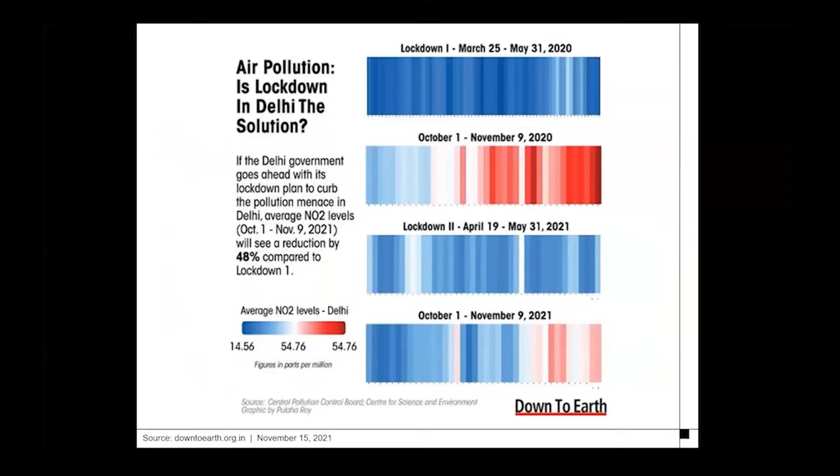Bill Gates, all of you know Bill Gates, but have you read this book called How to Avoid a Climate Disaster? This is a year-old book by Bill Gates. And in that, he also comes out with this.

Having said that, when we talk about cities, we use all kinds of words: rethinking cities, sustainable cities, resilient cities, livable cities, and the latest buzzword is smart cities. To be very honest, I don't really want to decode all of them.

I would like you to also respond, unmute if you can, quickly. Can you tell me what you see in this slide? Can somebody unmute quickly and respond? What do you see in this slide? What is your reading of this slide?

Rapid urbanization, yeah, fair enough. Anybody else? Fast speed of life, okay. What else? Anybody else?

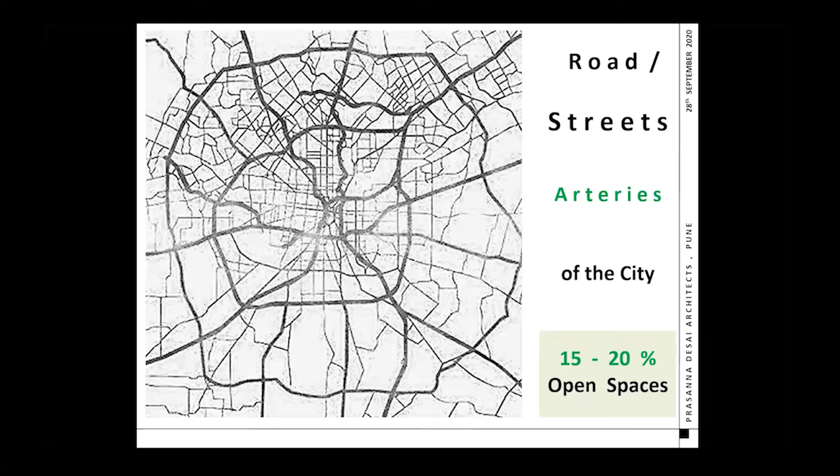Now I come to a situation where we say streets and roads are arteries of the city, and this is actually 15 to 20% of the open space. In any city for that matter, minimum 15 to 20%. And we compare it with a human body. So the human arteries actually carry the blood, and similarly, the city's streets carry the movement.

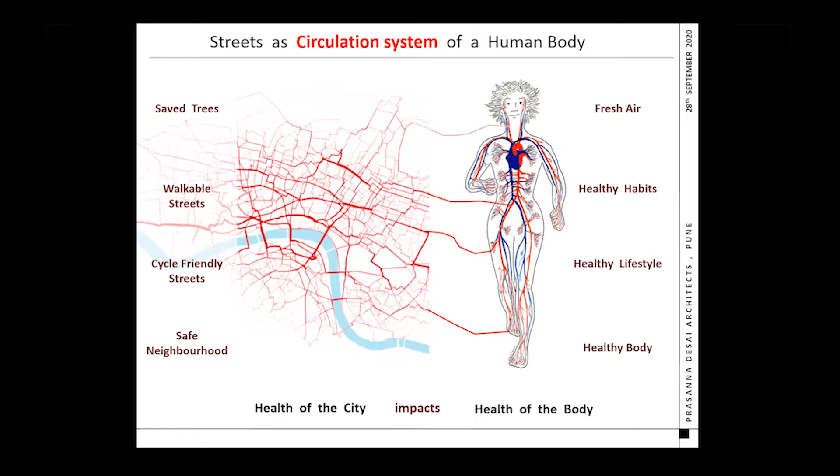So in a city, if you have saved trees, you get fresh air. You have walkable streets, you get healthy habits. You get cycle-friendly streets, you have a healthy lifestyle. And you have a safe neighborhood, you have a healthy body. That is what we are looking at.

But is it really fine? Is it safe at times for you or us? How many of you have heard this name called Enrique Peñalosa, where he says, point to ponder, a developed country is not a place where the poor have cars. It is where the rich use public transport. That is a developed country.

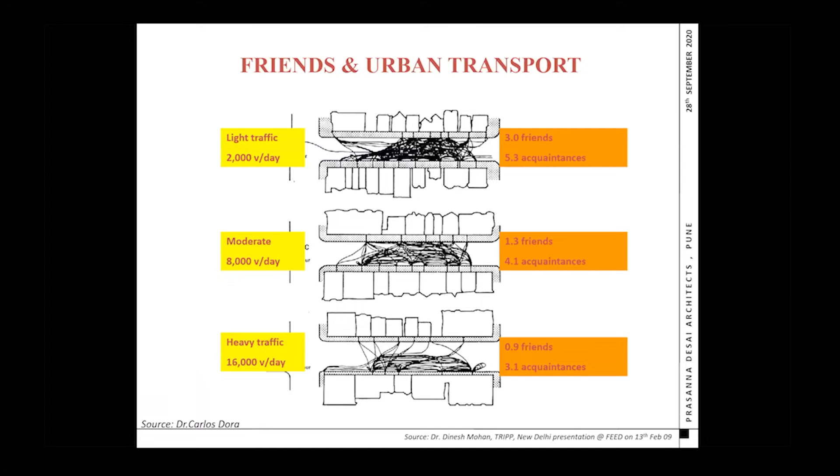So I can very well, very categorically say through this research that because of this kind of development being shown on the left-hand side, we are dividing the society. The society is getting divided. And we as a society will have to pay a price for it unless we reverse the process.

It doesn't matter, you keep on widening the street, more lanes, more lanes. Mumbai very proudly added flyovers all over the city 15 years ago. What has happened? Your streets are also full, your flyovers are also full. You added an Eastern Express highway, slowly that will also be full. Now you want to add a sea link or something on the other side, that will also be full. It will not solve any problem.

It is like this. How many of you have heard of Lewis Mumford? Building more roads is like loosening your belt when you are getting fat.

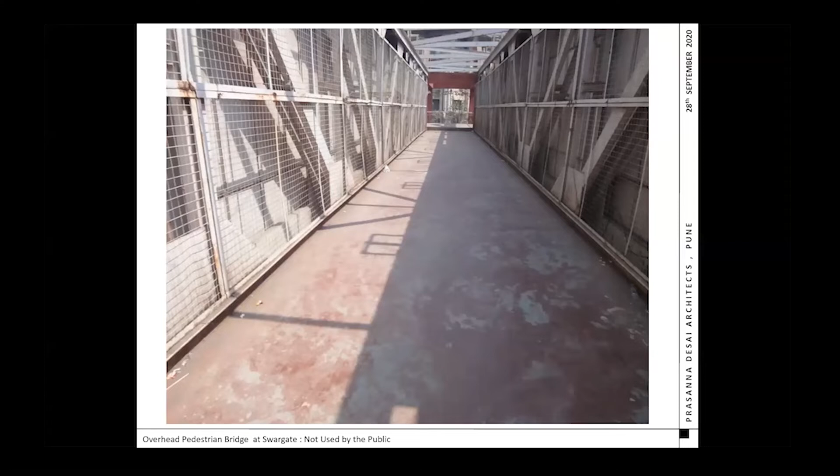Now, to make it safe, next thing you can do is this: you make it transparent. This foot-over bridge is constructed in Pune, at Swargate, at a cost of 5 crores or whatever it is, and in a day, not more than 10 people use it.

So foot-over bridges, people will not walk unless they are connected with a railway track, the way it is in Mumbai. You have from platform number 1, climb up and then come out straight to JJ college on the opposite side, crossing the road. That is fine. I'm saying this specifically because most of you are from Mumbai and stay right there at JJ college. But these kind of foot-over bridges are absolutely of no value.

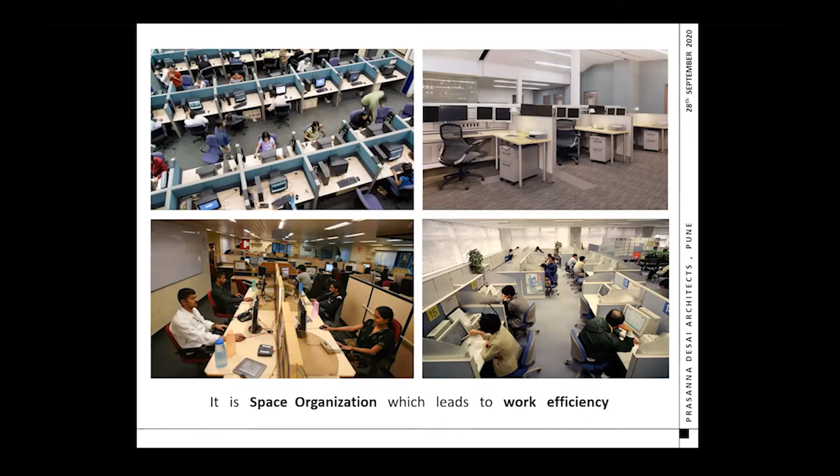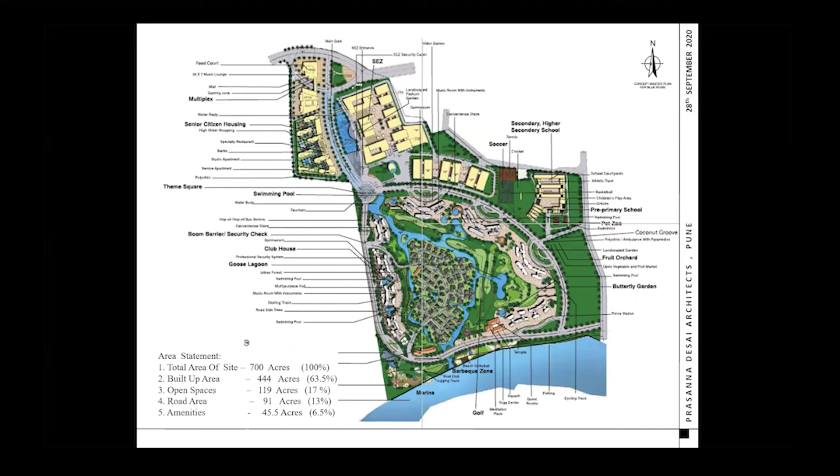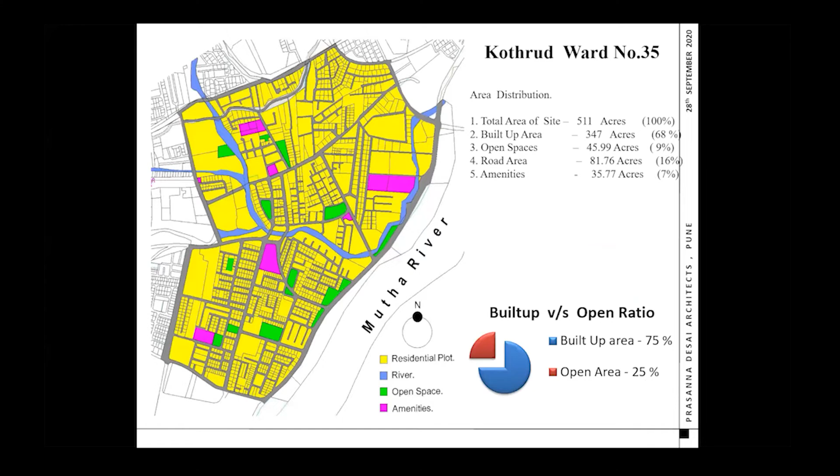And if that is so, we took these master plans from these brochures. Our whole argument is, if the builders' township needs to have this kind of fabric, then why can't one ward—a ward being a municipal limit of a corporator—why can't we have a ward which has all this walkability, cycle paths, museum, garden, everything, but we reorganize the ward? And this is the kind of analysis that we did.

And there are some more slides. Look at the importance of trees in certain brochures: Take your mind to wonderful new highs. See beauty, live beauty, think beauty. I'm just picking up some random things—this is the way we look at greenery. But do we really care for this green? A fresh viewpoint for a thinking mind.

So with this kind of background research, we say this is the dasha—you understand dasha?—and we keep on criticizing. So we have a project evolved over two decades of research, called Project Disha. What is Project Disha? It is a demonstration of integrated, safe, habitable, affordable solutions for a neighborhood. Very simple, that is Project Disha—give a direction.

You need to come out with solutions, you can't only be criticizing. So how to change the dasha to disha? Data collection, design, discuss—you collect the data, design something, discuss with people, and then demonstrate. That is Project Disha, and it incorporates very simple things: street lighting, garbage disposal, trees, walking, cycling, public transport.

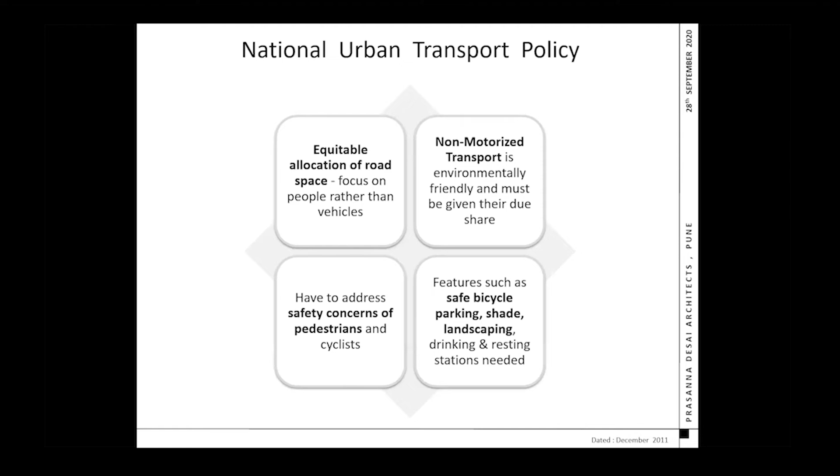Now let me come to this interesting slide. What will you do with 1,000 crores if you have it in a municipal corporation—whether Mumbai, Satara, Jalna, Kolhapur, Nagar, or Aurangabad? With 1,000 crores you get an underground metro of just 2.5 kilometers, and this is very old data—now you won't even get 2.5 kilometers. An elevated metro gives you 5 kilometers, meaning 200 crores per kilometer.

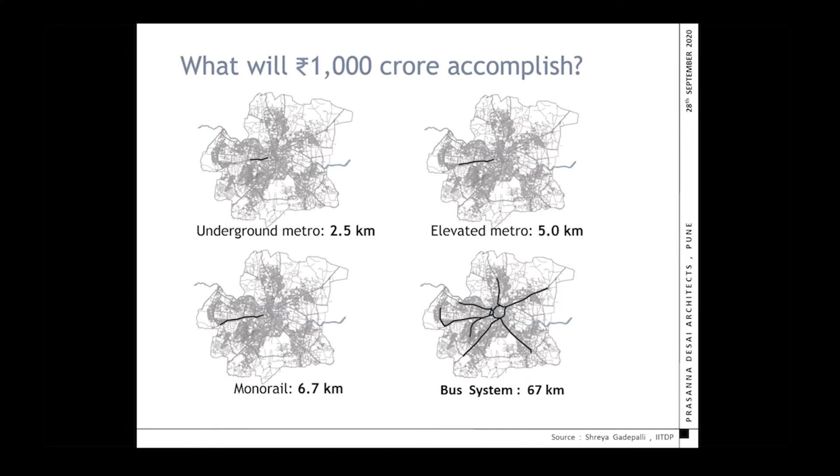A monorail gives 6.7 kilometers, whereas 1,000 crores gives you a bus system of 67 kilometers. Smaller cities like Jalna, Kolhapur, and Nasik should have a bus system—a nice bus system is good enough. Maybe larger cities need a metro. Having said that, it's the cycle, pedestrian, and public transport—bus in particular—which will hold the city or the neighborhood together.

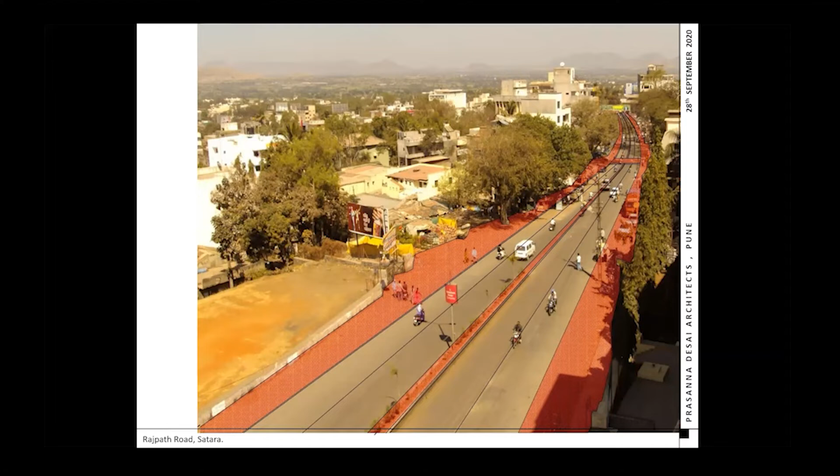So fair enough. Then we have this another medium that we use now. Can you see this video? This is the way we take a video of a street. And we demonstrate to people that this is the only space on a street being used for vehicles. The rest is parking and pedestrians. And that is how we build up our theory.

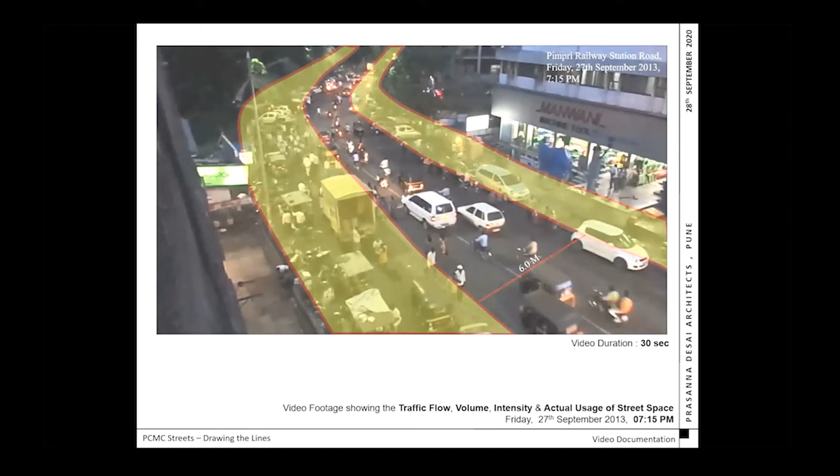This is in PCMC. The time is there—evening, 7 p.m., peak hour traffic. And then there's another video of the same street, this was way back in 2013, almost 9 years ago. And then we make views like this. Now comes architectural composition, our area of expertise. And then we build this up—rickshaw at a particular spot, two-wheelers at a particular spot, more parking provided. I will show you how we build this up.

Now, guiding principles in the public realm are six. Number one is universal accessibility. This is the main act that we use. Universal accessibility gives us the advantage of making a footpath at one level. And once you put in universal accessibility, this is all the benefit that you get: your wheelchair can move, your blind can move, your trolleys can move, your pram can move, and also your shopping cart.

The second one is walkability at continuous surface that we discussed—continuous surface, footpath at one level, uninterrupted movement, safe and segregated walkway, which will get us health, comfort, social interaction, and connect between people, and reduce vehicle trips on the right-hand side that I've written, pollution, chaos, and conflict.

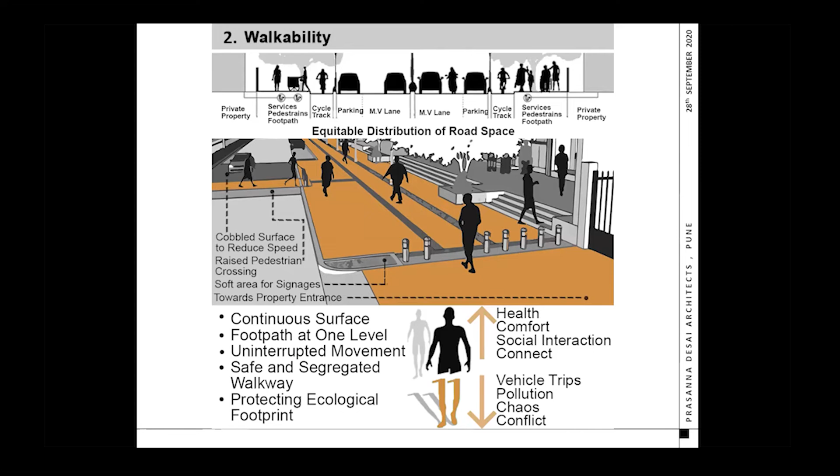This is point number 2. Point number 3 is parking. This is very critical. We must provide for parking, but it cannot be inclined parking.

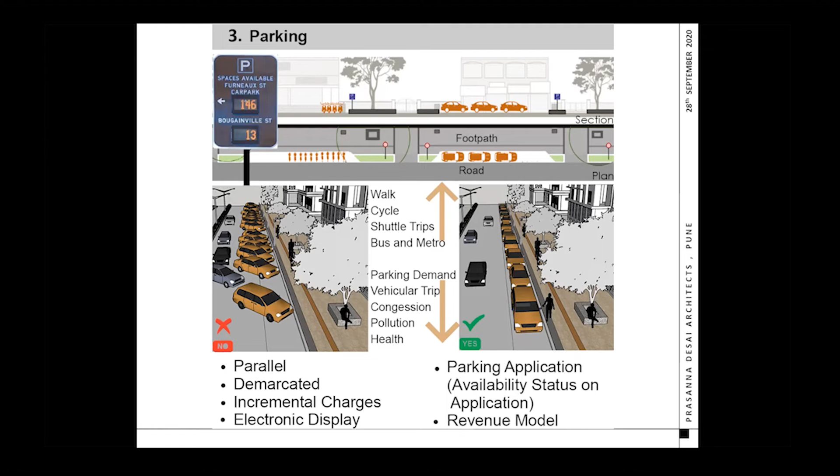And parking needs to be charged. It has to become a revenue model. You have to pay for every 1 hour of parking. Parking cannot come free. Hawkers and vendors policy.

I showed you some slides of the mall and everything. Why can't our street have this kind of painted tiles where a hawker is given a space, and that is his space, and there is a movement space? So this is the way the hawkers have to be organized.

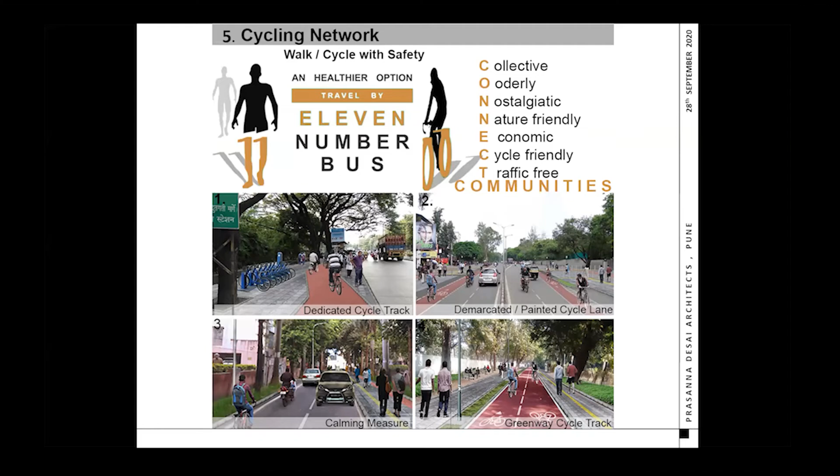The fifth one is cycle network. Can we provide a cycle network? I will not go deeper into it. There are 4 kinds of cycle networks that can be done: dedicated cycle track, demarcated painted cycle lanes, calming measures, and greenway cycle tracks. Maybe we can take this up in the question answers.

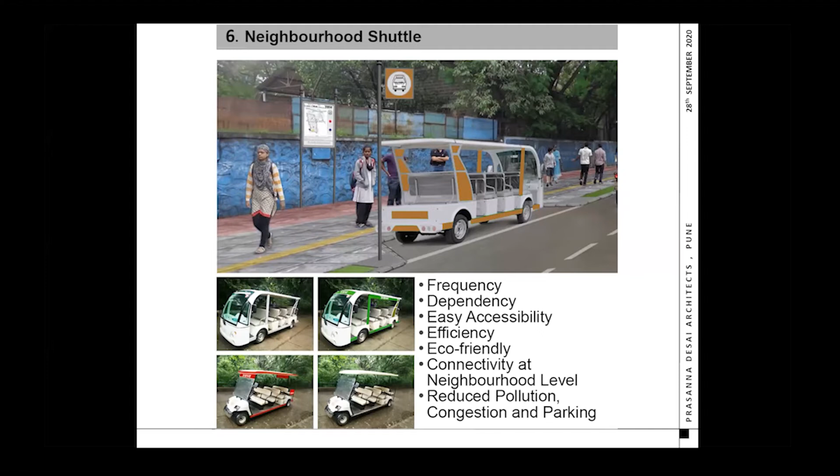And the sixth one is neighborhood shuttle. Now this is very common in Mumbai. You have a railway station and you have rickshaws which work like shuttles to bring people 1 to 2 kilometers up to the station. So in a neighborhood you can have shuttles which share and which also reduce the need for taking out private vehicles. So these are the 6 principles on which we started the design.

And we told the local corporator, dear sir, why don't you do it the way we are explaining? Do it like us, people will be happy and it will give benefit to the neighborhood.

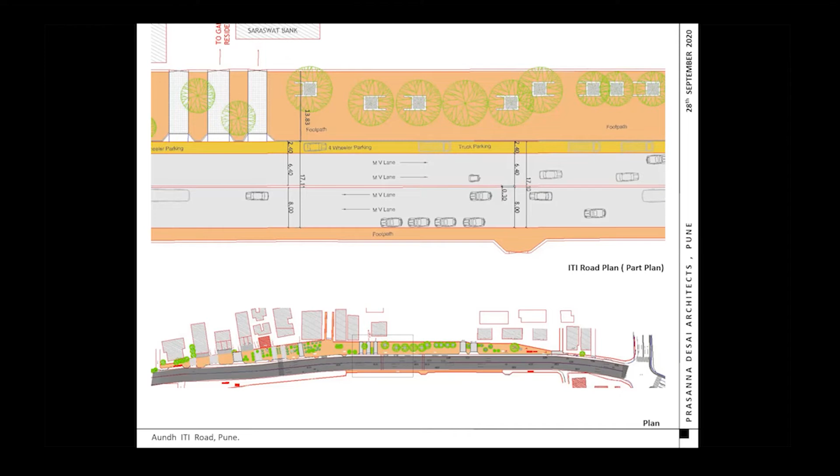Now, when we did this street, there were many questions raised. In my own society where I stay, they said, oh, you have seen how big a footpath they are building, the corporation people's minds have gone bad. This was the discussion going on in my society. So we didn't bother much. We continued, we made this, and then it became a hit for the people.

So this is safety, this is shade, and this is society. All three incorporated. And all that I discussed in the beginning with you, one by one, point by point, we are trying to incorporate in design.

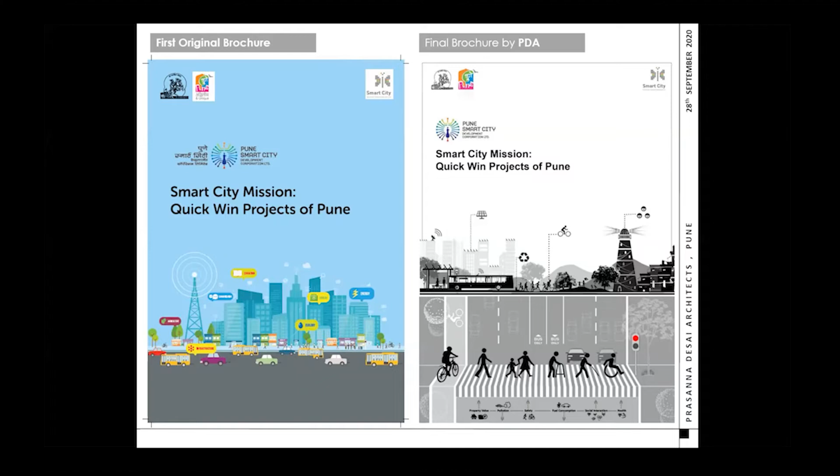Smart city has two components: PAN city and area-based development. We worked in area-based development with these policies: people, policy, participation, platform, and patience. In these kinds of projects you require tremendous patience, friends. You have to be very patient. You have seen our journey over 20 years.

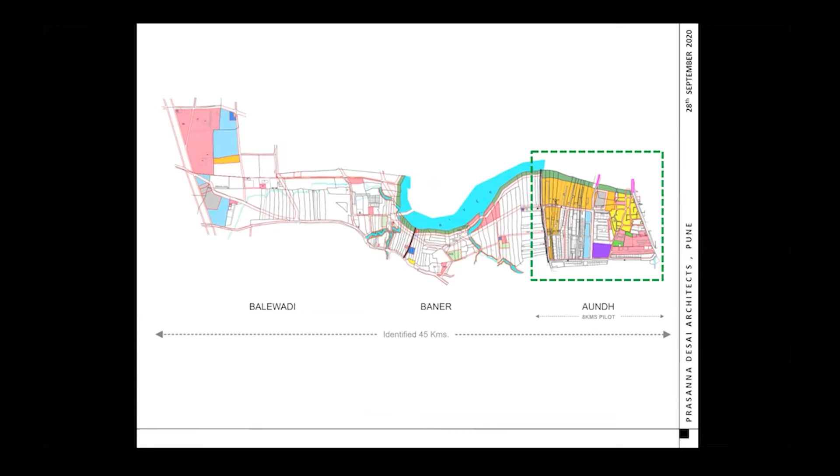We had a key plan and concentrated on Aundh, which was the area-based development. We told the Honorable Commissioner that rather than doing one street, which is a quick win project, we will take up these 9 streets. You can see the streets marked red, blue, orange, yellow, etc. You can say S1 to S9 is the naming. We are developing these streets one by one.

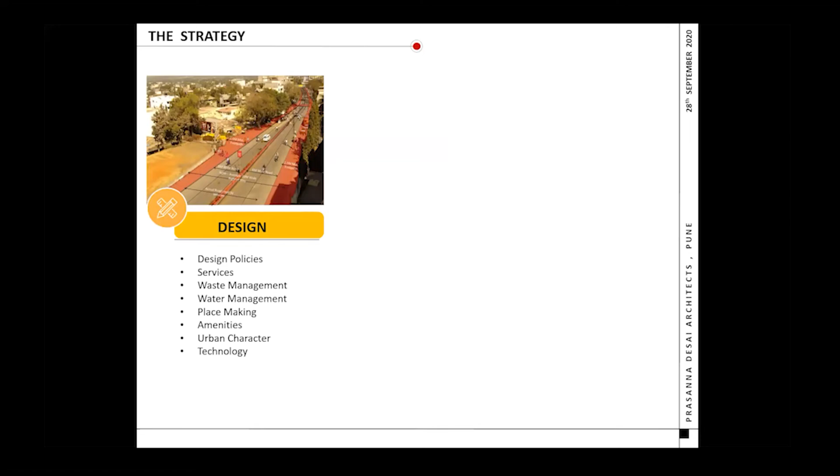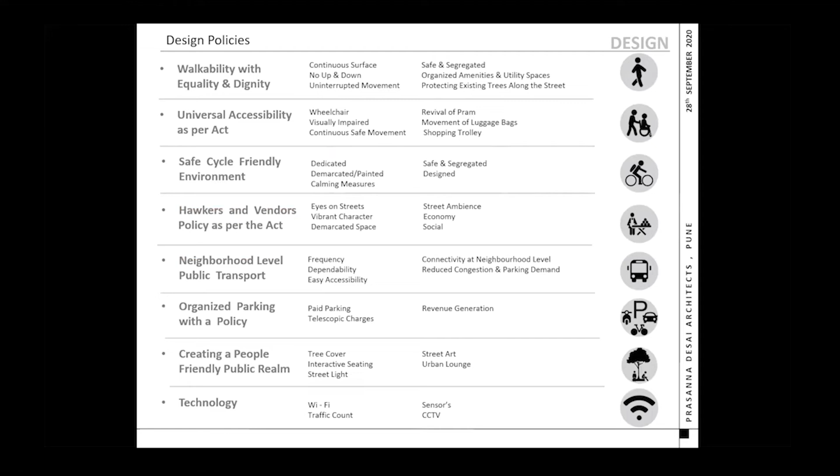The strategy is design, discuss, and demonstrate. These were all the elements I discussed. Our policies included walkability and universal accessibility, cycle friendly design, hawkers, and all that I mentioned. Then services like water supply, MSEB, drainage and all. Then street furniture, signage, public art — I will show you what we did. Then character, facade, material, texture. And then the design proposals were done.

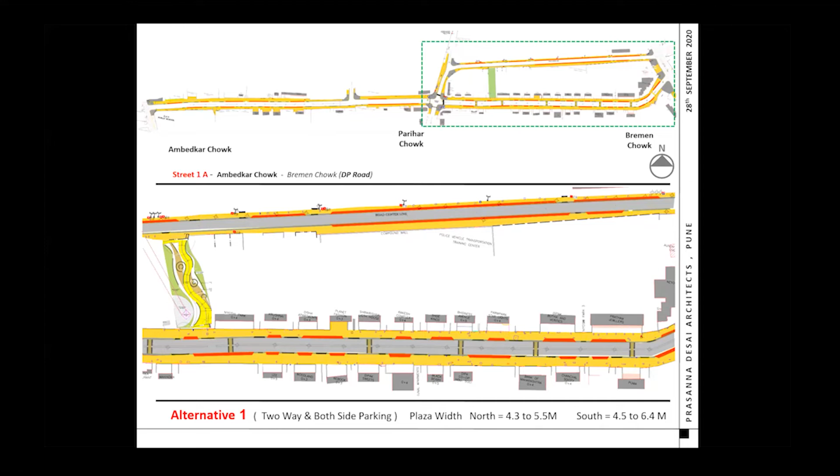These are the plans we made with options and alternatives. The bottom shows parking on both sides. The red marked is parking. Yellow is footpath, and the gray is the road, that is the street. There was a parallel street on top. So we had a proposal with parking on both sides. This was the street as it was, and we proposed how it could be.

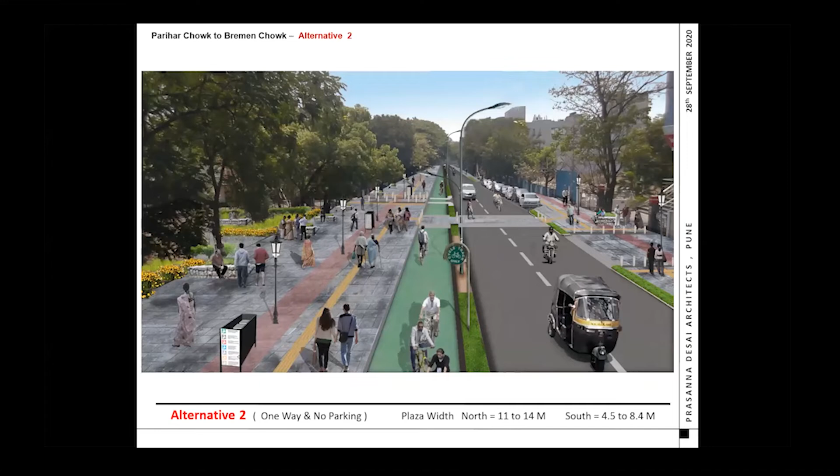We had another proposal where on the left-hand side we'd make a complete plaza, and on the right-hand side there would be a one-way street. We did this, and then we went into public discussions.

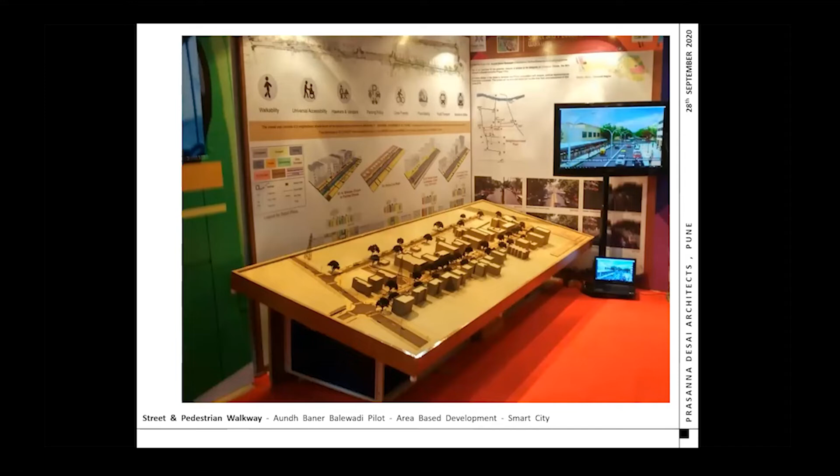We said we will close the street on the left-hand side and do a trial run. Then we again had public discussions with shopkeepers, citizens, and the Honorable Deputy Commissioner, and we named this whole project Healthy Aundh Ata Aple Angan. All of you understand Marathi — if you don't, it's not very complicated, it's Hindi: Healthy Aundh Ab Apna Angan.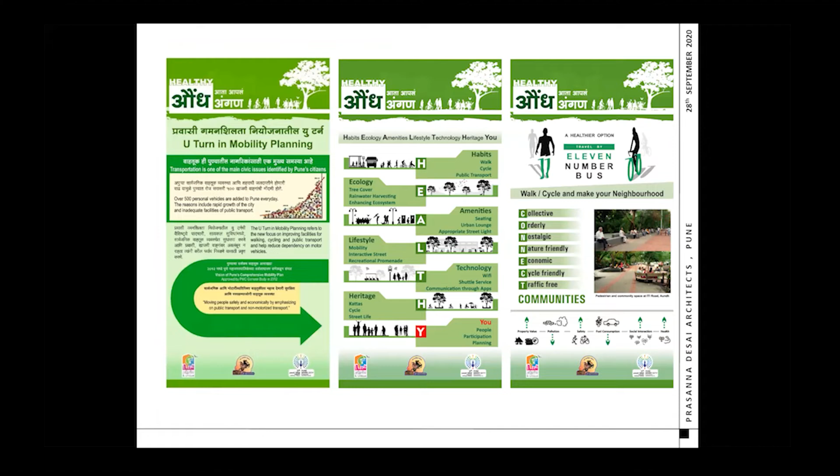Then we had these kinds of invitations, all made in our office. CEE, Centre for Environment Education, helped us, and many NGOs helped us too. These are all the posters: U-turn in mobility, the 11 number bus that I explained, DB Road Walking Plaza, and improvements in Aundh.

Then we introduced a shuttle service called Udan — green, orange, red, purple and yellow shuttles moving clockwise and anti-clockwise. It looked something like this, with a signboard like this, all designed at our office. We put up these signboards and tried to introduce this service.

There was a one-week trial run, Saturday to Saturday. During the trial, we closed this street entirely. This is the way people used the street — I don't have to explain, you can just have a look at the street and the way people use it.

So Stapu there, children with tricycles, small children skating, wheelchairs were back, handicapped people were back, senior citizens, cycles, and Udan - this was our Udan. We could manage this as a Udan, and this was the most successful thing. We made those stickers - can you see the stickers? The red sticker there, that is the red Udan. The left one is the yellow Udan. And these are the happy faces.

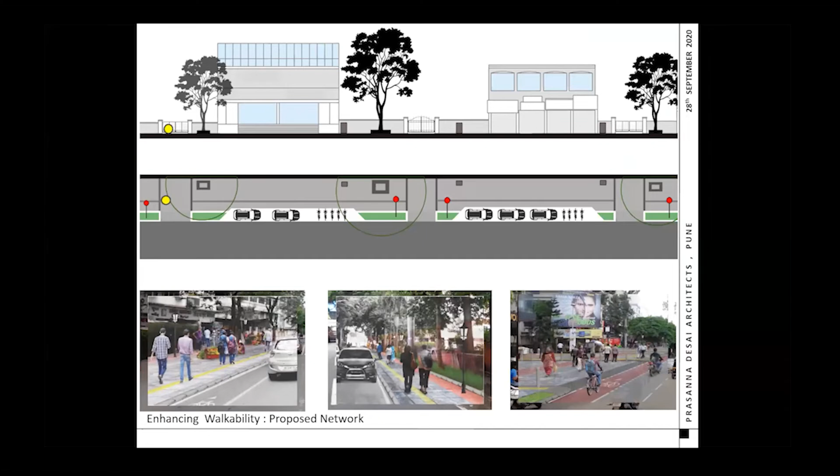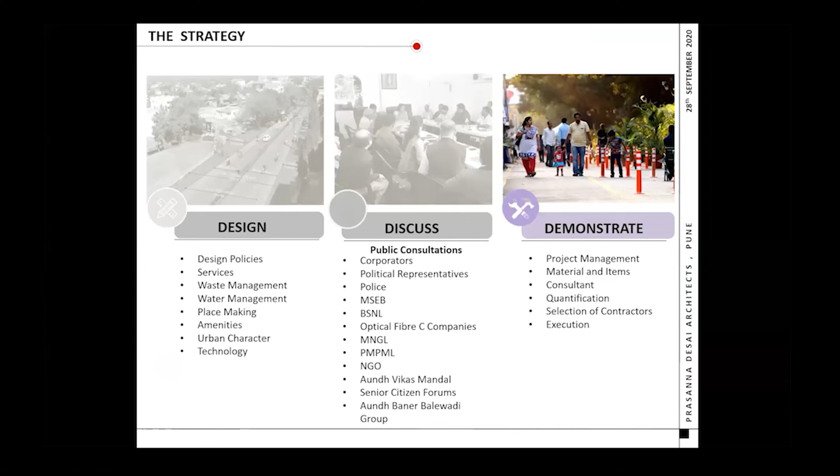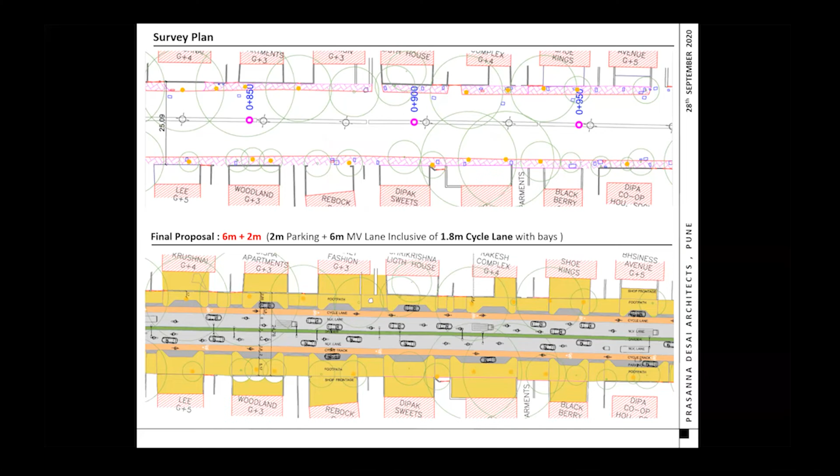We came to this design. Now comes pure architecture and urban design. You can see this yellow at the bottom, the top is the plan. The yellow is the footpath which was there, and people were going up to the shop there. So we said we will not close the whole street - we will have vehicles both sides, we will have parking on both sides, and we will have the yellow. But what we'll do is widen the yellow, and take the yellow right till the doorstep - widen the street. That means take out the boundary walls which are there in front, because this was all a commercial street. I will show you the images later on.

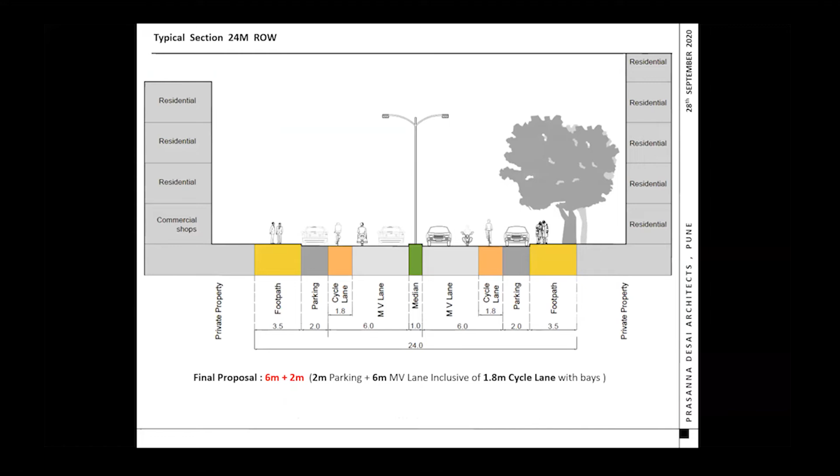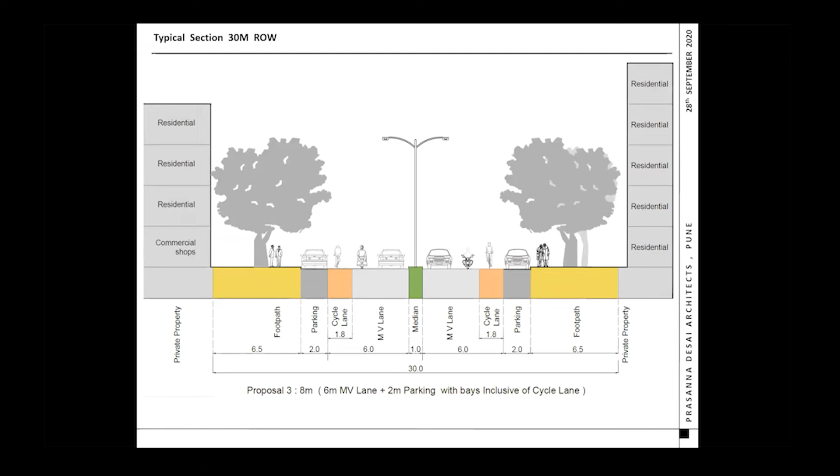So what you see in this street: the MV lane is 6 meters, then there is parking of 2 meters, then you have the footpath, and we took the footpath right till the property line. The yellow was extended right till the shop. So we had a wide footpath on both sides, 6 meters wide. We put in the services below, and then we got this whole thing signed from the commissioner and the engineer and all, to authenticate that this is what we are going to implement. And this is what was agreed, and these were the elements that we put in.

Hi, Ananya, do we have time? Can I go slow or fast or close? So you can go the way it is going. It's all right, is it okay? Yes, Saturday evening is not getting hampered, no?

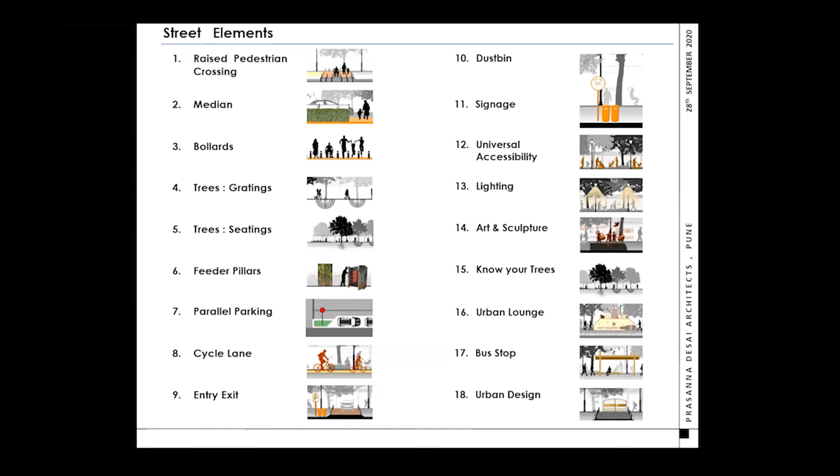No, definitely not, sir. So, raised pedestrian crossing - first element of our design. This is the way our speed breakers are in all the streets, so where you jump, at times you skid. Speed breaker causes 30 crashes and 9 deaths a day. So we said we must redesign this. How do we redesign this?

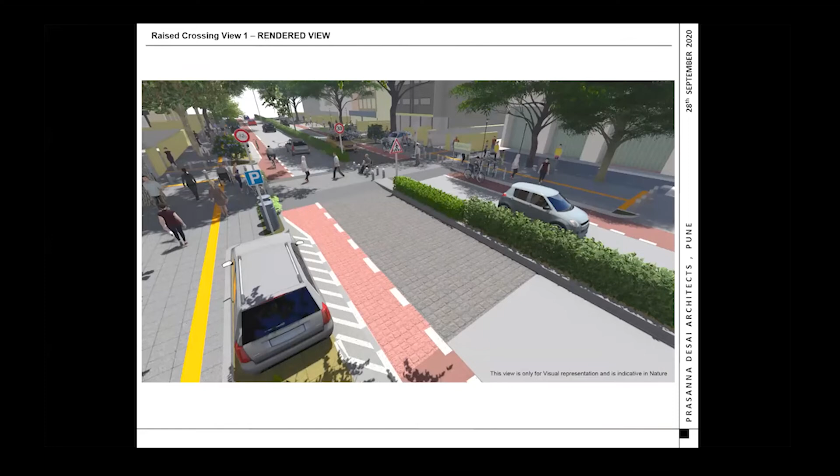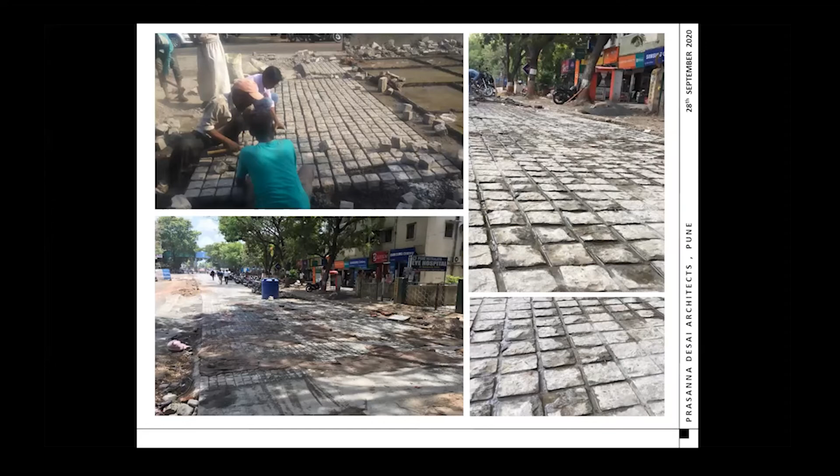We had this whole idea of putting cobble. You can see this diagram - there is a cobble there, and then the raised pedestrian crossing. What is it? It is a stone like this. So this stone will bring down the speed, and we put the stone on through the street like this before the raised crossing. This automatically reduces the speed of the vehicle - you slow down because my own father or my own son is crossing. So instead of this normal speed breaker, this became like a speed breaker, and this is the way we implemented it. Now it has become common in the city of Pune to use this kind of speed breaker, which is called cobbled speed breaker.

So you raise the pedestrian walk at 6 inches above level. Median divider - dividers are like this, concrete dividers on both sides, or steel dividers. By mistake, if a motorcycle hits this concrete divider, what will happen? I hope he is wearing a helmet - if he's not wearing a helmet, again safety is an issue. So we said we have very strong objection to these concrete dividers, and that we should not have these kind of dividers. Then what kind of dividers should we have? We should have dividers like this.

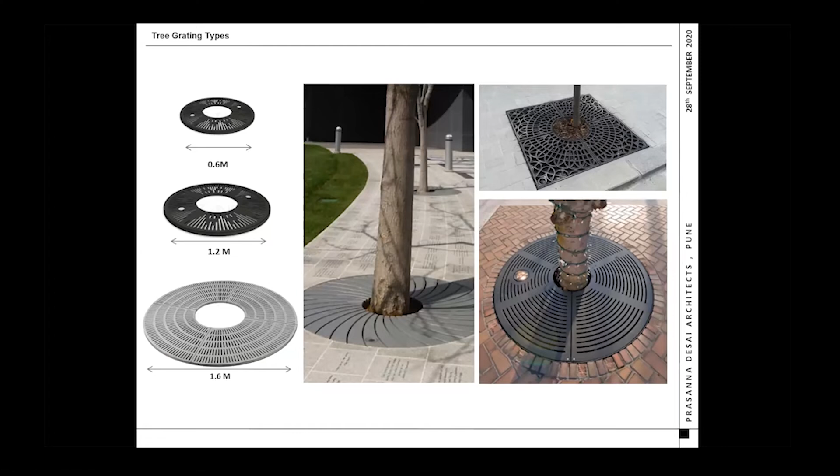Yes, so we manufactured these. And now this has become an absolute routine in Pune. Wherever we are working, people from all over the country are coming and seeing these streets, and they are repeating it all over India. So this is the way the tree gratings are. And these tree gratings are not made out of steel. If you make them out of steel, again, they will be stolen. And look at the patterns that are emerging on the ground.

So our office people, at the time, tell the contractors to leave a little space while placing the tree gratings evenly, and you can see the spacer in between, the way they have used the spacer to widen the size of the circle in the center. So this is what is flexibility, and this is what we design.

Now that is tree gratings. Now we come to another interesting area called seatings.

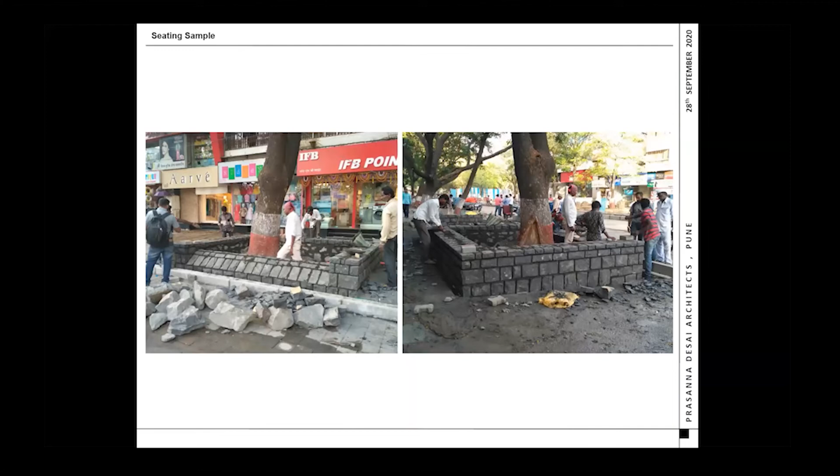Basalt stone? Okay. Should I move ahead? This is what we did, this is the stone we used. Pure stone with 2 meter by 2 meter breathing space for each tree.

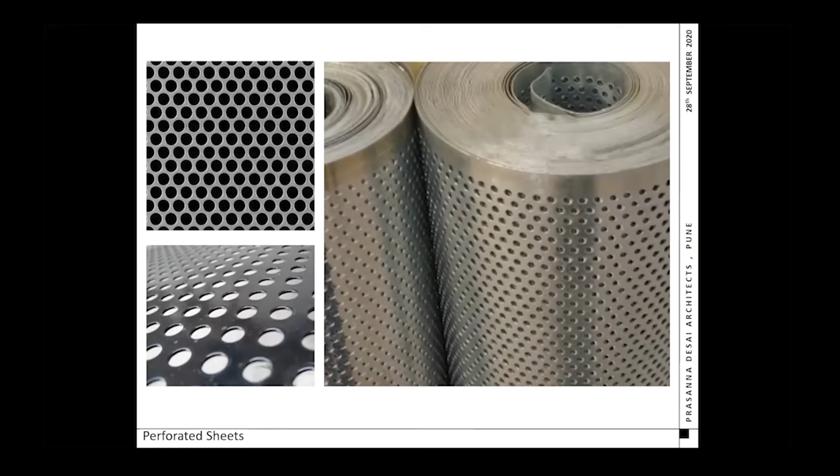So we said, okay, we will relocate them and make a cage around them made out of perforated sheets like this. This is the cage, and we will do artwork on the street. Inside is the DP box or whatever it is, MSEB, and then we put greenery all around. So this is the way we change the realm of the street.

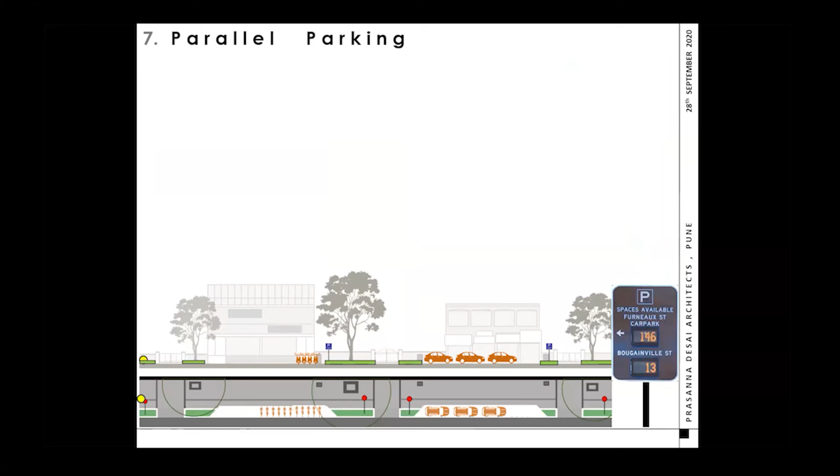Next comes parallel parking, which I have discussed earlier with counting. So we design parking like this: you can see in 2 meters there is a motorcycle, and in the same 2 meters there is parallel parking. The bottom numbers we see, we were not able to do, but we wanted a chip put at each parking space so we can count the number of parking spaces. Maybe in the next projects we will do this. This is the way the street parking is, it gets organized, absolutely organized.

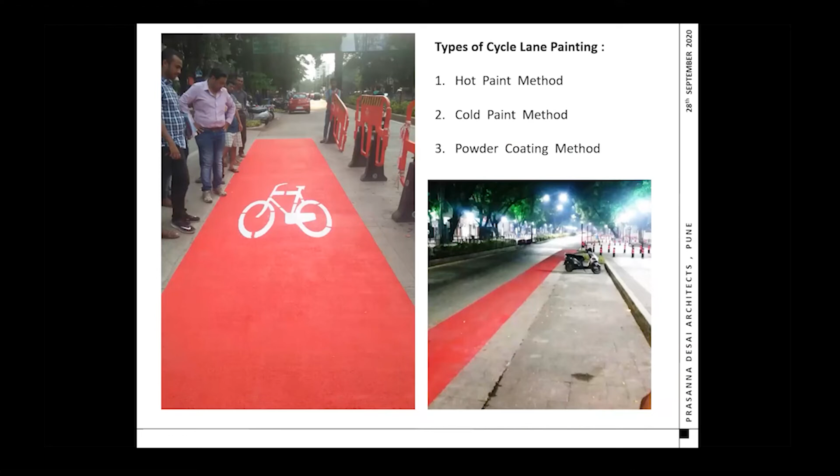Then there is a cycle lane, which is a painted cycle lane. We may discuss this at the end, because it's a slightly long discussion on why painted cycle lane, but there are different kinds of paints. So we painted these cycle lanes and it does work to a certain extent. So cycles came in, entry and exit, which I mentioned in the earlier street, up and down. So we put them at one level, this up and down is all gone, and this is the way it is.

So now comes design and utilitarian purpose. This again has nothing to do with beautification. Now this green looks good, that's fine, we are happy. Signages.

Sorry, the next slide isn't going. Universal accessibility - this is the tactile direction tile or warning tile. We have tactiles moving all around the footpath.

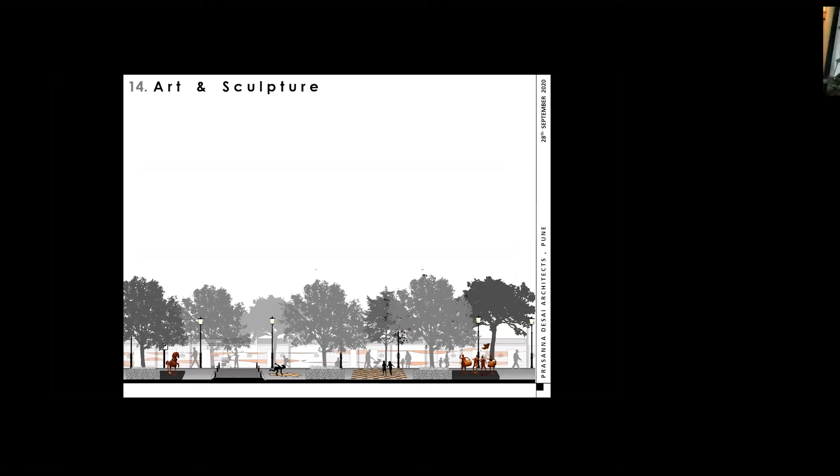Art and sculptures - the Pune Biennale Foundation had made sculptures during Pune Biennale, and they helped us paint and re-erect these sculptures, done as part of Pune Municipal Corporation's collaboration with the Pune Biennale Foundation. This is a mother and child sculpture. All these sculptures were located strategically at certain locations.

That is the robot. We also put in stamp concrete, snakes and ladders near the toy shop - we've improvised over time. This was the first one executed; now we're executing a number of streets in PCMC in particular. The color has faded a bit, but the game is still on.

These are engineering teams from Mumbai Municipal Corporation who came to Pune to look at what we had done.

Know your trees - as I told you, there are 50 species, so we said each species should have a board like this. This can be a botany class for the schools around - there are 4 or 5 schools on this street. Families can use it too; if the husband is inside shopping, the mom can read this, or vice versa. It's a knowledge base - know your trees.

Urban lounge is what we call the toilet - I won't elaborate. This isn't built yet, but I hope one day we create this urban lounge, which won't be called a toilet but the urban lounge. They were always blocking the footpath, so we're working on it, and this is what we designed. Let's see how it shapes up in years to come.

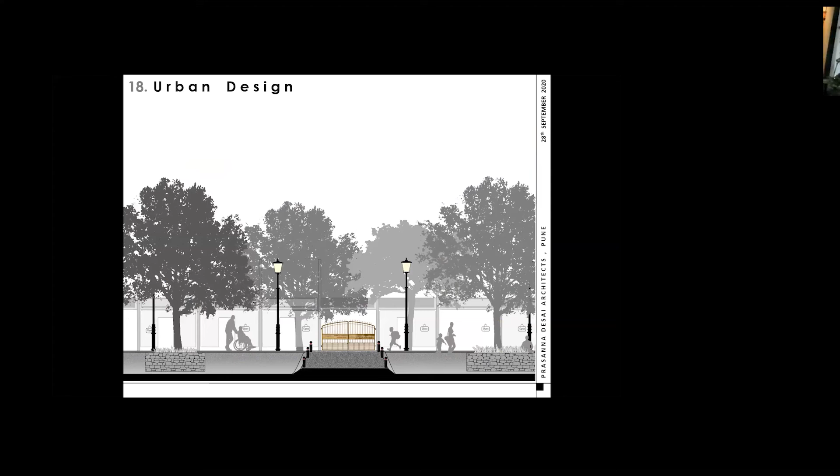Urban design of the street - these are the gates which were there, of different sizes, shapes, and colors. We said we will make it uniform. They said, change these gates - but why should we? This is steel and we don't want to waste these gates; they are nice. So we numbered them, put them together, made a sticker like this, and arranged the gates this way, so there is uniformity. That is the character of the street, and that is how it will look.

Street ambience - now there are only images, as we come to almost the end of this presentation. This is the way the street looks.

This is the chit chat, more of a chit chat. There are some black and white archival photographs by Shreya Gadepalli.

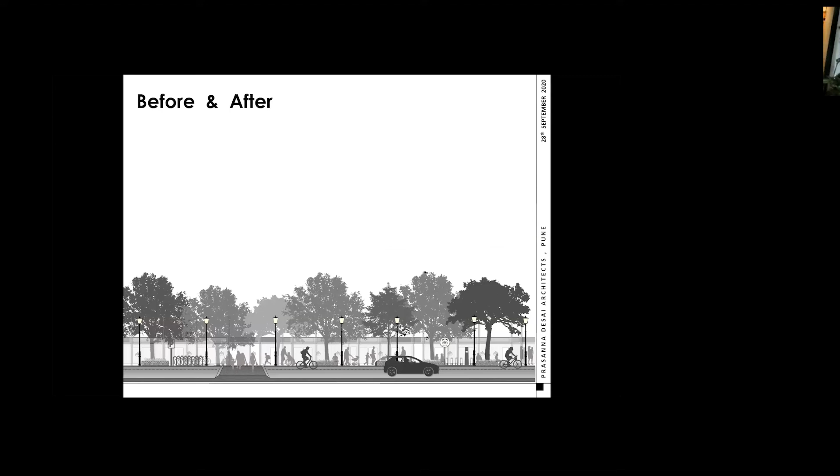This is before and after, which could interest all of you. How was it before and how did it get transformed? This was before - you can see the Bank of Maharashtra. And this is what it is now.

Chaudhary Diagnostic and the tree - same before and after. Look at this one, Vision Express. This is the central photograph we have, but we didn't have a very good one - but this is how it looks, and it is now absolutely green, as I showed you.

This is where we could get the boundary wall in. One thing I forgot to tell you - in all these cases, if you see the before, the boundary wall is right in front. You can see the boundary wall is moved back. So whatever boundary wall was there in front of the shops was demolished, and that space was taken as part of the footpath. That's how we got a wider footpath.

This is very critical to understand. So this boundary wall shifted, and this is what it became. Here also you can see the change - the boundary wall shifts, which is in front of the shop. And this is one of the best ones. Can you see the boundary wall here? Near CRM, this boundary wall is gone, and that is how this whole footpath becomes wider.

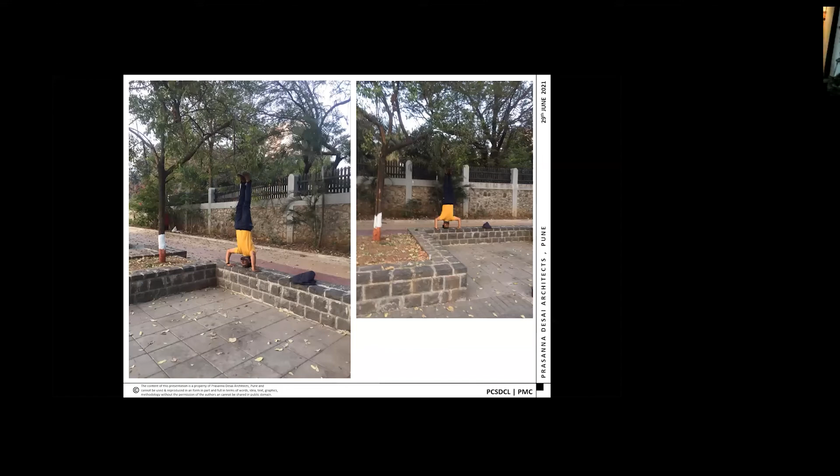And what more do you want if kids use it like that? This is a skating track actually, so it is used sometime or it is used for cycling by kids. People use it for all kinds of things. This is our corporator who has put all these elements here, which has become a selfie point.

These are the other streets. I'll show just 10-12 slides of PCMC, Pimpri-Chinchwad Municipal Corporation, where we have done these 6 streets and they have got converted like this. They are not very high profile ones, but they are the utilitarian ones. This is next to the D.Y. Patil College campus in Akurdi station.

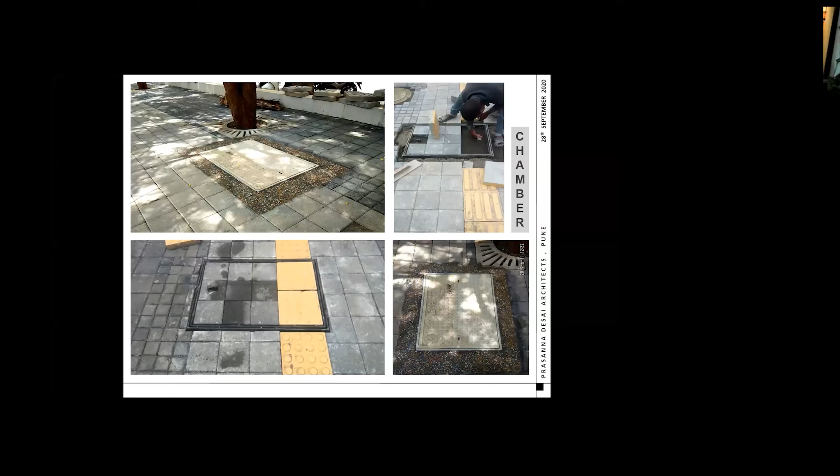You can see the people walking in the second slide on top. Bollards and finishing, which has now become a little better. Sitting made of stone, which is ready-made, picked up and fixed. Percolation of water at the edges of the D.Y. Patil campus. Gratings of different kind - you can see the grating taking different shape.

Now you can see a different gentry. The DP Road is slightly very higher income group, whereas this is the middle income group, and everybody uses these seatings - youngsters, students, you can see on the left-hand side slides. This is the way the street looks after the painted cycle track, which we have been able to do very successfully. Not only have we been able to paint, you can see the tree canopy and the street.

How does it look? These are the junctions - you can see the junction, the way it is worked out. There is another junction, and cycles on the painted cycle tracks acting as safe space on the street. That is your space for safe cycling.

And this is my last slide almost. On the left-hand side, you see the mother supporting the kid on a tricycle or a cycle. We only hope that this kid drives his cycle safely the way these 2 kids on the right-hand side are driving. If one is able to achieve that, I think that is the biggest contribution one can make in a neighborhood, and that is what I think we really need to look at. This has been our journey, and the journey continues.

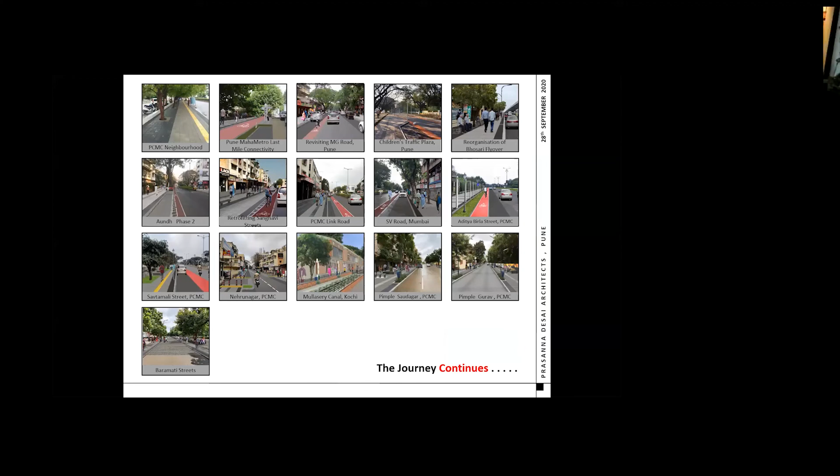In the end, I would like to say that the depth of the democracy is decided by the width of the footpath in a city.